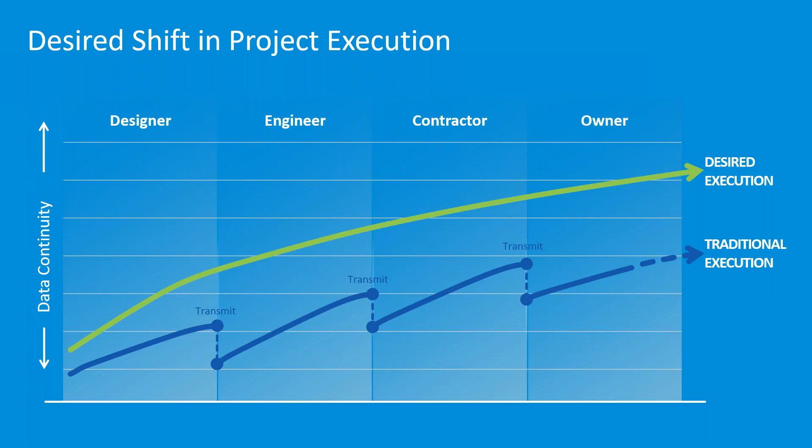So essentially, if you have in the end a very rich model where we've used asset tracking, where we've used all of the different aspects of BIM 360, then we get a very intelligent model that we can report on, that we can hook up to sensors, et cetera. So that's really the story of digital twin of 2 weeks ago. But as I mentioned at that time, there is really a piece still missing, which is in pre-construction, which is sort of the constructability.

Can we build it? How does clashing work, et cetera, which is really the remit of BIM 360 Coordinate. But essentially, again, single source of truth, we do get our common data platform, which is BIM 360 Docs as the main driver and vehicle, if you will, for all the information. And then depending on the discipline that you're working in, there might be some added tools on top of that, such as BIM 360 Design, but also BIM 360 Coordinate and BIM 360 Build.

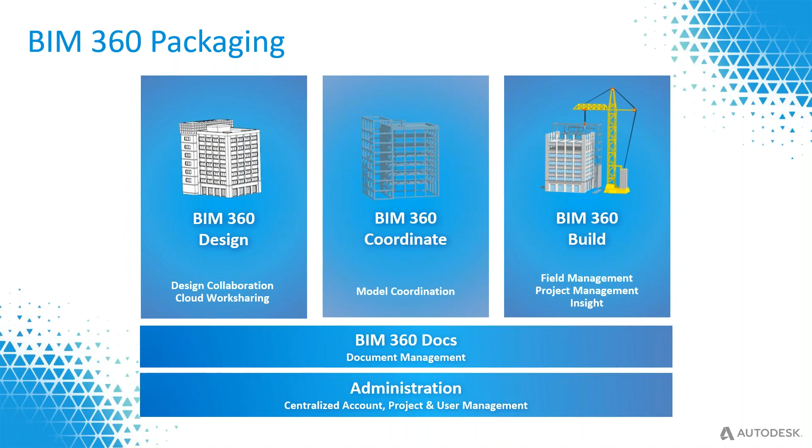So over time, before the holidays with the BIM 360 Design webinars, and then after the summer holidays with Digital Twin, where I did talk about BIM 360 Build as well, the only thing that sort of was missing was BIM 360 Coordinate. And there is quite a bit to talk about here, so that's why I kept it into a separate webinar. So that's what we're going to be looking at today.

So BIM 360 Coordinate, essentially, these are things that we see around the business. So in general challenges, it essentially is, again, around communication, right? We've already talked a lot of times about BIM 360. One of the key aspects I keep saying, and I keep repeating myself, is indeed that large model viewer, which allows us to view just about any file without the original authoring tools such as Revit or AutoCAD or Civil 3D or even Bentley MicroStation or whatever.

But still, when it comes to collaboration between different disciplines, yes, we've seen BIM 360 Design, yes, we've seen packages, but what about making sure that we don't have clashes, for instance? How do we make sure that we have communication between those different teams from that aspect? How about missing project information? Do we have all the relevant information inside of the same location? That's also very important.

And then one of the last aspects is that coordination is indeed considered to be a specialized activity, not just from the discipline itself, where we have to understand how to filter clashes, because if I just clash one model against another, I'm bound to find thousands of clashes. So you need to sort of filter out and understand what these clashes mean, but also because it is critical that we do coordination between different disciplines.

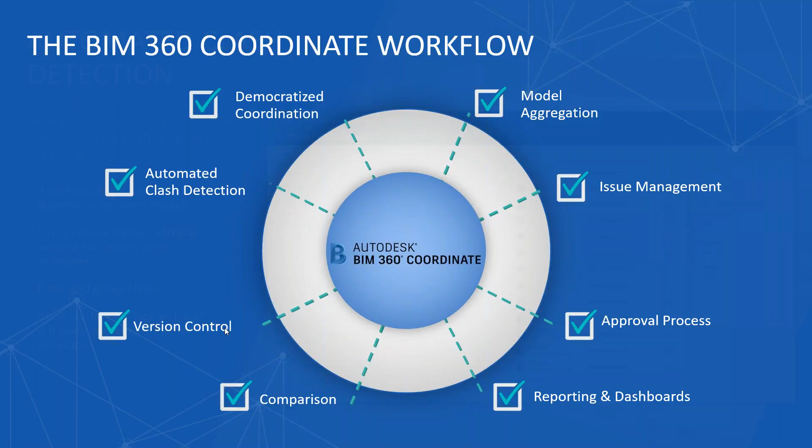Issue control and version control. So it means that we can have issues on clashes, and maybe in the next version we've solved that problem, so those issues can be closed. And so essentially that's sort of what we're looking at from a BIM 360 Coordinate point of view, right? So automated clash detection, and we'll go through the actual tool in a second.

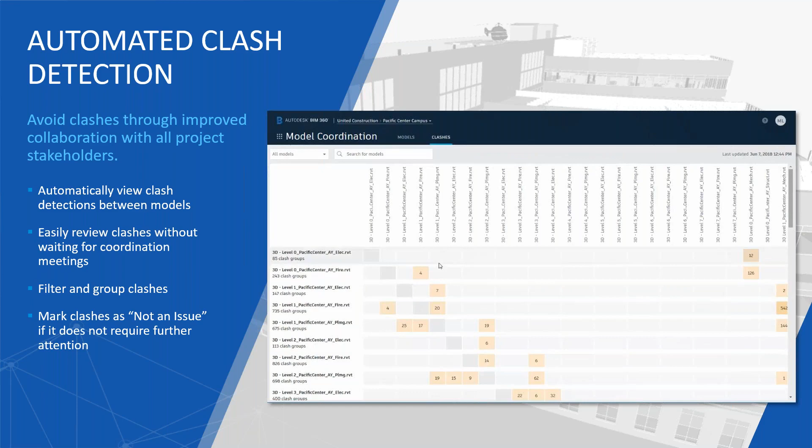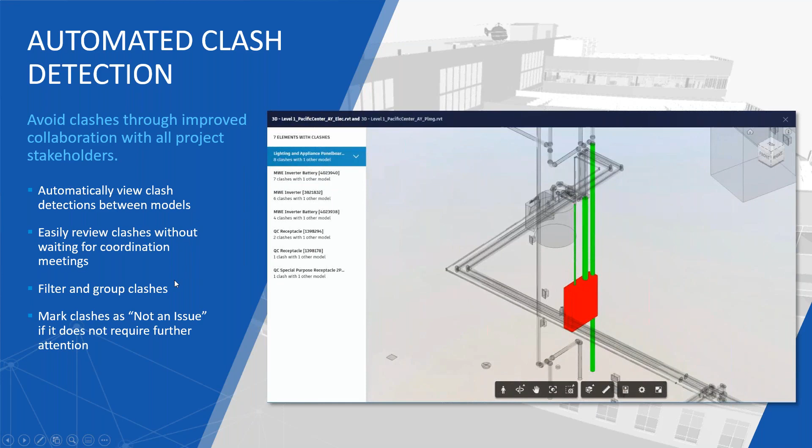It essentially means that we've got what we call a coordination space. We drop data into it and automatically we get the clashes. We get this nice matrix layout, which will help us understand how that clashing is working. So that's one aspect. We'll see all of this in action in a second. So automatic clash detection. As I mentioned, democratized coordination.

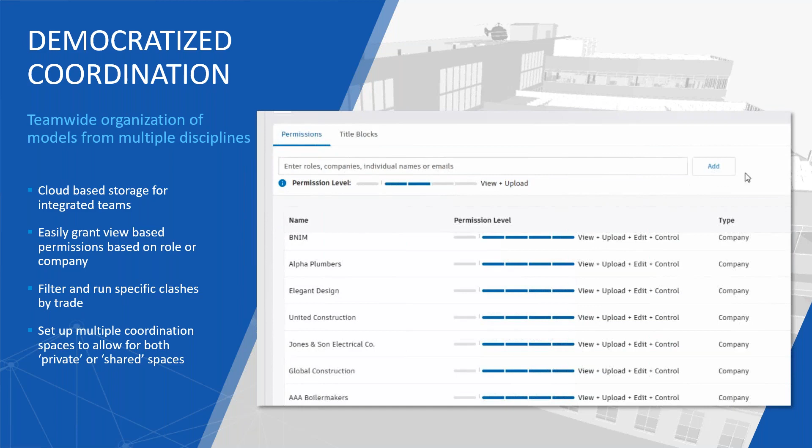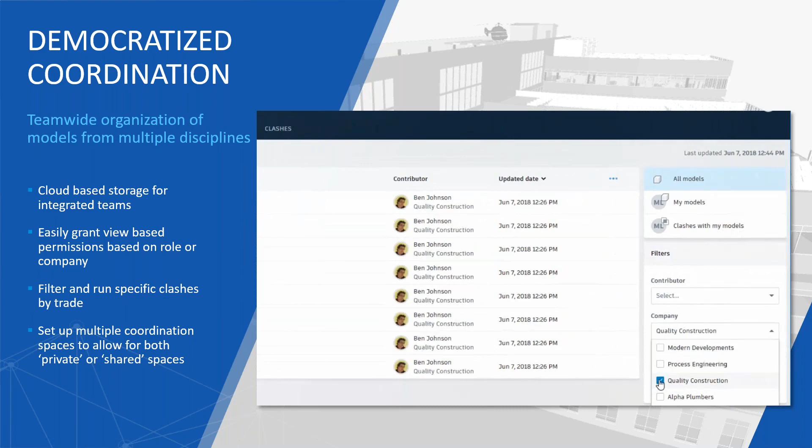It isn't anymore about having to understand how to upload. No, it is BIM 360 Docs at the basis. We can actually, and I'll talk about a workflow which will leverage BIM 360 Design actually, and the packages there, but we can leverage that information right inside of BIM 360 Coordinate. So essentially it means we have a design, we save it to the cloud, and we automatically get our clashes out of it. We'll talk about that workflow in a second.

And then model aggregation. One of the things that we can also do is that, well, obviously, if we want to clash elements from, let's say, structural to HVAC and vice versa, or to electrical or whatever, it means that we have to be able to bring those models together.

So one of the aspects of BIM 360 Coordinate is also that we can view different models in context of one another. All right, so last thing is obviously when we find clashes, we need to be able to create issues on them, and that's sort of what is happening here as well. So once we find a clash, we can say, right, let's create an issue.

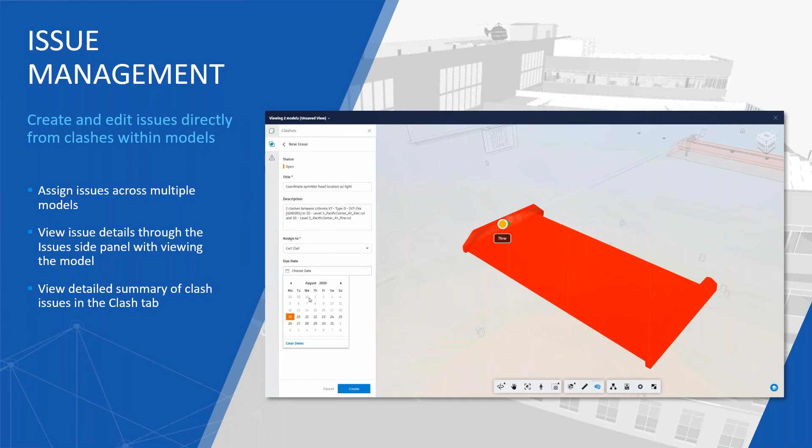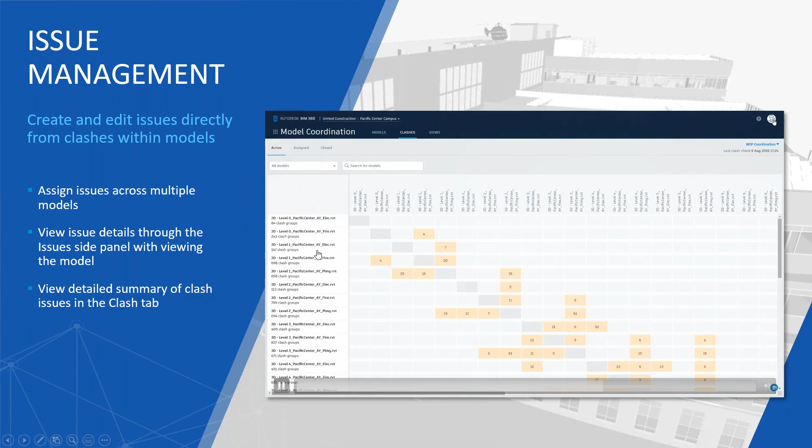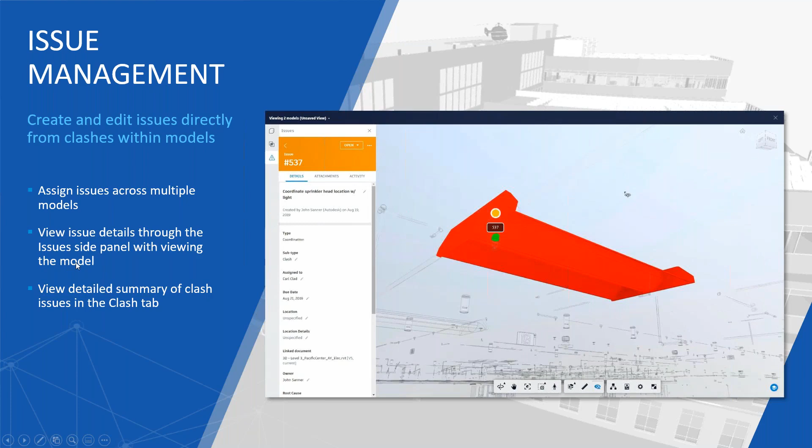And the most important thing here is that if you saw the previous presentations on BIM 360 Design, where we can approve packages or we can send packages back, we can create issues on those. We can create issues in one file. We can create issues in BIM 360 Coordinate. They all end up in the same place, which is BIM 360 Docs essentially. So we can start reporting on them, we can start pulling out information from them, etc. So that's sort of what I want to highlight from a PowerPoint point of view for BIM 360 Coordinate.

So let's dive into the actual environment. So I've got my BIM 360 Coordinate open here. Actually, it is, of course, BIM 360 document management at the basis. And again, what you'll notice maybe if you followed the other webinars is that I'm still in the very same environment, still the very same BIM 360 Docs project, which is BIM 360 FY21. And so again, to reiterate the fact that this is indeed a single source of truth, when we talk about BIM 360 Design, we talk about these folders here where we have our architectural project, our MEP project, etc.

Now, what we have here is what we call a coordination space in BIM 360 Coordinate. So I've mentioned this in the previous webinars as well. We're looking at our single source of truth from a document management point of view here, but we can also sort of filter our information based upon what we're looking for. So for instance, assets, which I spent a bit of time on last time, cost management, for instance. So there are ways of filtering this information. Amongst other things, there is this model coordination aspect, which I'll dive into in a second.

And essentially, the only thing we need to do is tell BIM 360 where my coordination spaces are. And in this case, I've created my aggregated folder here. And what you'll notice is it says here master.rvt. One file is in my aggregation space. So just to go into my configuration here, just to show you that this is indeed how we set this up, it's actually quite simple to do. We go into our project admin, we go into model coordination. Just bear with me for a second. There we go, model coordination. And so quite simply, it says here aggregated project files, coordination aggregated is the folder.

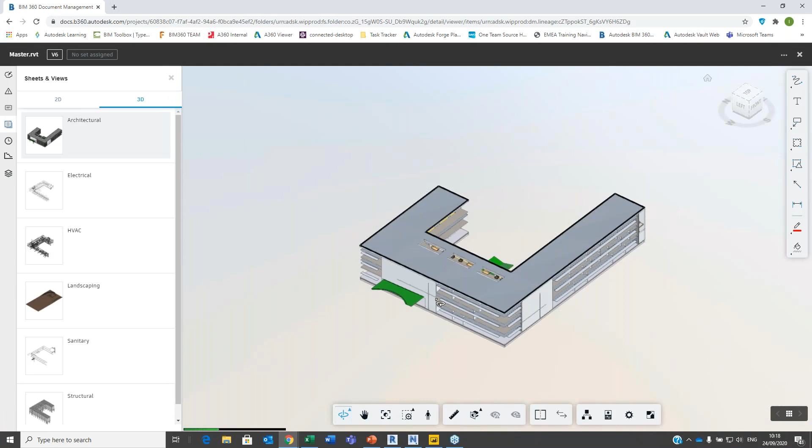Okay, so let's go back into document management. And just to reiterate, we're in coordination aggregated. And again, what you'll notice is that it says here master.rvt, one Revit file. So how can we clash elements from a Revit file? Well, actually what we're doing here is that we're going to be looking at views that we created inside of this file. So before we go into clashing, let's just have a look at what it is that we have here. So inside of my master file, I have different views. So architectural, electrical, HVAC, etc., right?

So essentially, that means that if I now move over to my model coordination, it's going to tell me that there is indeed just the one file, master.rvt, but it has multiple views. And so we're looking at this from the model coordination aspect, if you will. So I can now say, okay, first of all, before we go into clashes or anything, let's just have a look at maybe the HVAC system.

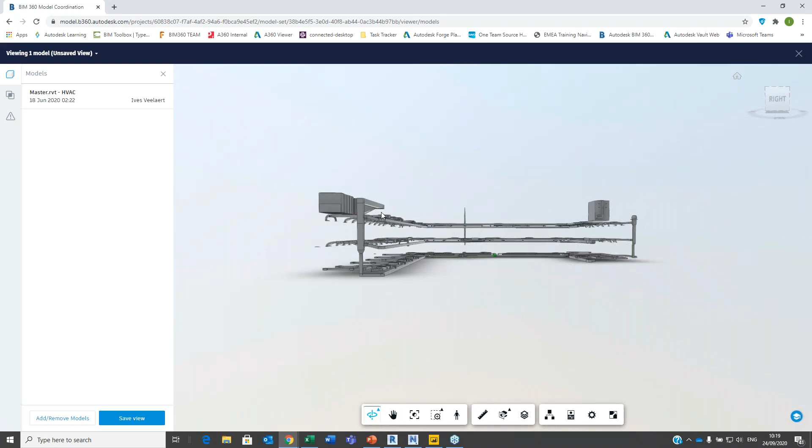Okay, so nothing special. This is what I've just shown you in BIM 360 Docs itself. This is indeed the HVAC system, right? So that's what we have in the building. The difference is that I can now say add remove models, and I can now say, okay, I want to have sanitary as well. So you'll see that it now says I'm loading 2 models, and there's my sanitary.

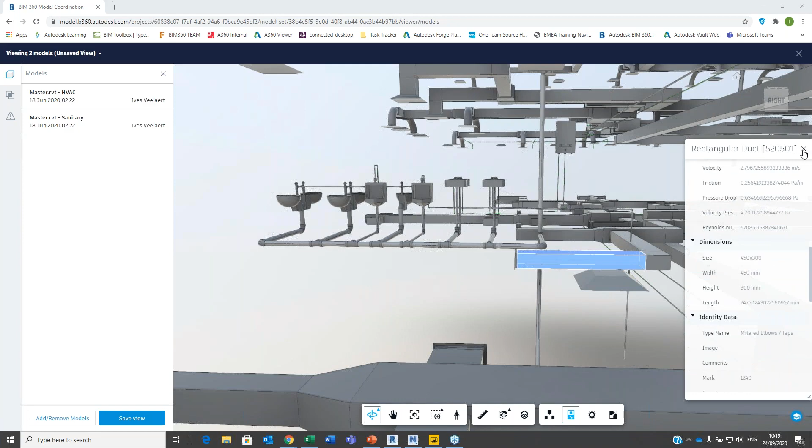And I got, again, all the richness of this viewer is still there. If I want to understand what this is, I can still go into the properties, and it's going to tell me this is a rectangular duct. It's got all the information from Revit inside, and that's what we see here. Okay. So yeah, we've got HVAC, we've got sanitary.

Let's just continue to add some stuff. So maybe the electrical bits and pieces. So let's have a look at that. So we now have the lighting fixtures, we've got the electrical sockets, etc. And we can continue to move on. Maybe I want to see the landscaping now. No, let's first do structural. Select. There we go. So now we've got floors, actually floor slabs. Okay. Whoops. There we go.

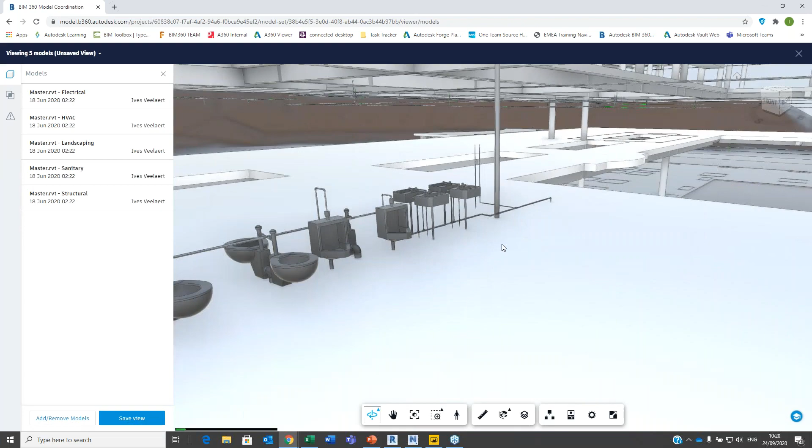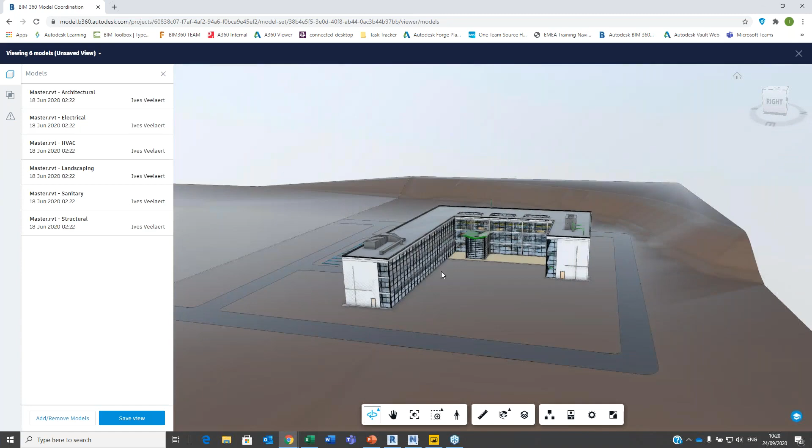And let's just continue, so I want to have the landscaping, select. Okay, so here's my terrain now. And finally, I'm going to add architectural. So those are just views. And let's just go out here for a second. There we go. So these are just views, this is one Revit file, different views, and we're looking at this in a combination. Okay. So that's the first aspect.

And what we can do now is, well, we've got all those different models, so we can clash them. And actually, this is happening automatically, right? So we can actually go in here and say, look, we've got our clashes. And what we're looking at is a matrix of each and every one of the views clashed against one another. So architectural versus architectural, well, that's not gonna tell us much because that's gonna be everything, right? So on the central axis, if you will, it's the view against itself. So that's why we don't have anything in here.

So architectural versus electrical, for instance, gives us 62 groups of clashes, and I do want to specify groups of clashes. I'll explain that in a second. Architectural versus HVAC 134, etc. It's also color coding. So the more orange and the more red it turns, that's where we really should be focusing on, maybe. So architectural versus structural is giving us 1,488 clashes, groups of clashes, I should say. Right. So let's focus on something here.

So maybe you've noticed that if I clash HVAC versus electrical, for instance, it gives me a result. But obviously at the other side of the axis, electrical versus HVAC should give me the same result, right? HVAC versus electrical 5, electrical versus HVAC 4. So that's not really in line, right? So what's happening here? Well, this is where the grouping comes in, because it tells me there's 4 clash groups, and here are 5 clash groups. So let's keep this very simple.

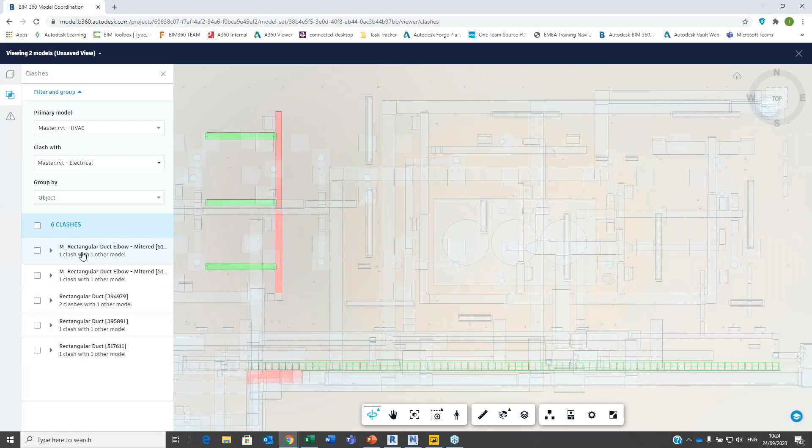6 clashes, but from, again, an HVAC point of view, I'm looking at 5 groups, which essentially means I've got my 1 problem here, which is that one. I've got my 1 problem over there. I've got my 1 problem sitting over there, 1 problem again over there, and I've got 2 problems over here. See? So that's how this is working.

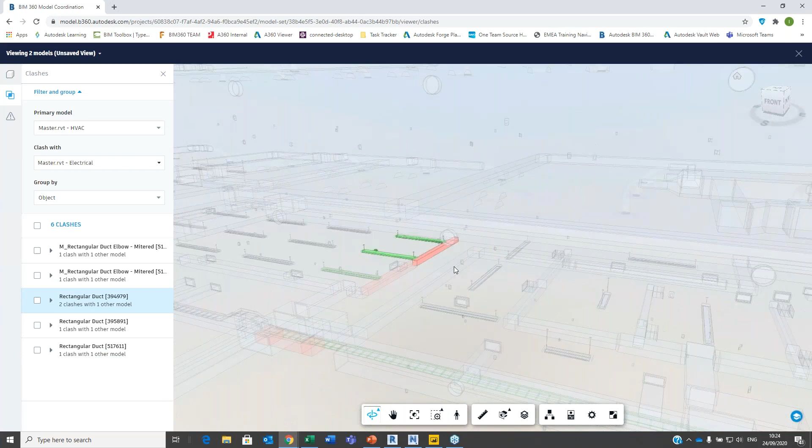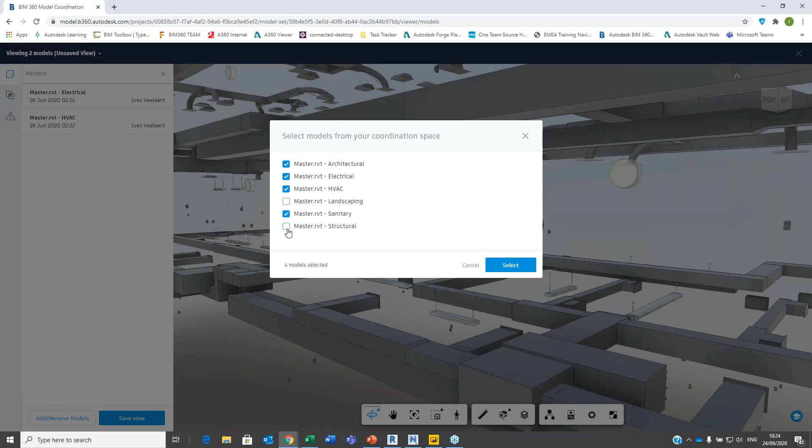Now, what you'll notice, and this has been added like this week, what you see here is that we've got our elements in context of one another, right? So HVAC versus electrical, and that's it. Now, maybe I want to see the rest of the model, right? So what I can do is I can go back into my models here, and I can say, you know what? I want to have all of, let's not take landscaping here, but let's focus on the rest here. So I've just added everything.

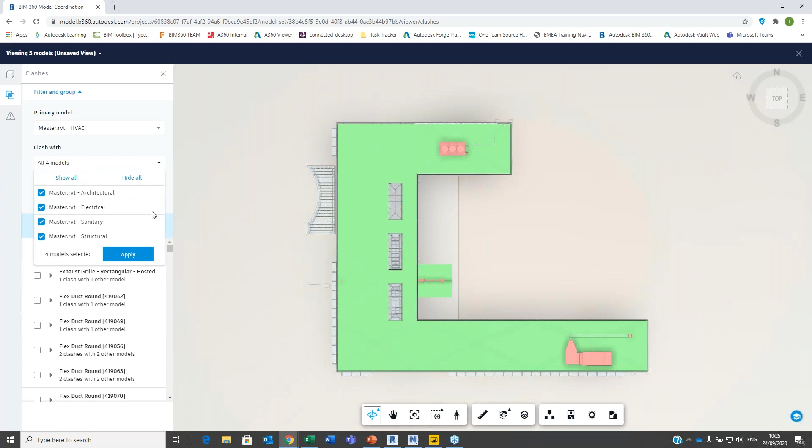If I go back to my clashes, I can now say, okay, HVAC, that's fine. And it's going to clash now with all 4 models. So it's now in the matrix, it's now taking multiple columns together. We've got 1,118 clashes across everything. Now, maybe what I want to do is still just focus on the electrical bits and pieces. So what we have now is, again, those 6 clashes, but now in context of the architectural model, etc.

And so from this point on, it's quite simple to say, I want to create an issue on this one. It's going to create a screenshot. We can assign it to someone, etc. You'll see that in a second. Now, the other aspect is that we can also get our elements sorted by a certain group. So in this case, we're just looking at objects. We can also say, okay, in the case of HVAC, I want to understand this from a systems point of view. So the mechanical exhaust air has 3 problems with the cable tray, as you can see here, right? And again, we can create issues on that. Right.

So, okay, I've got my views. I can look at the clashes. So let's go back to my clashes here for a second. This is pretty flexible because I could say I want to search for models. Maybe landscaping. What's the point of having landscaping clash with like a pipe that will run into the ground, you know? So maybe I just want to get rid of landscaping. So what I can do is just remove this here. And we now get a matrix of 5 by 5. Landscaping is out of the picture. So very flexible to actually go in and say, look, I wanna understand clashes between certain views, if you will, certain models.

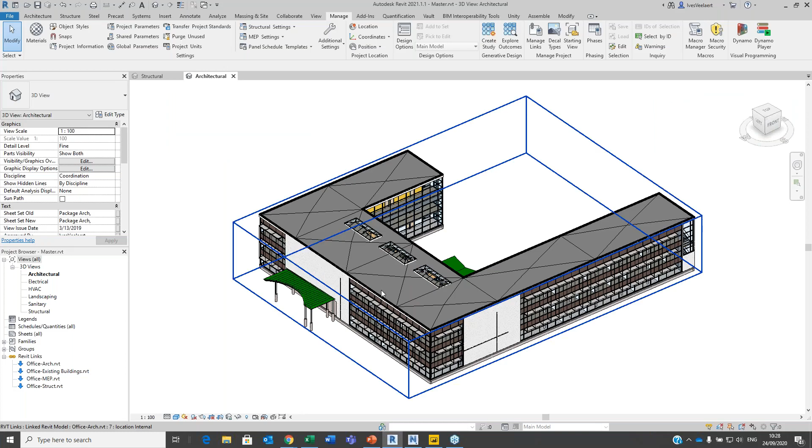Now, the question is, what did I upload here? So what you'll see is that I've got my different views. Those are the views that we do have inside of BIM 360 Coordinate. But what you'll also notice is I don't really have any elements in here. This actually is a link.

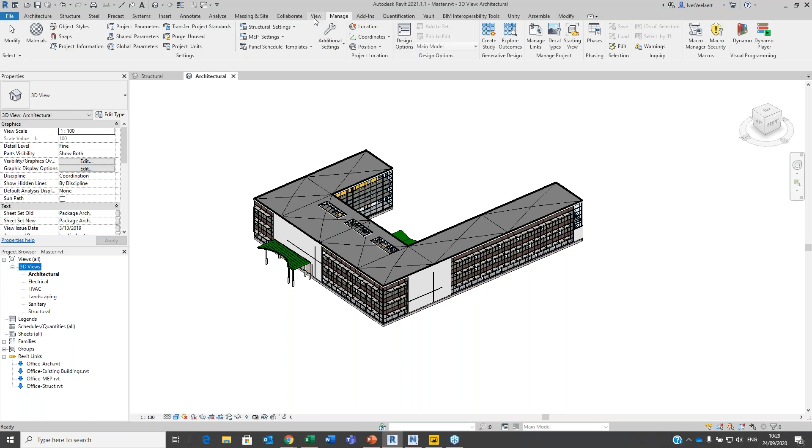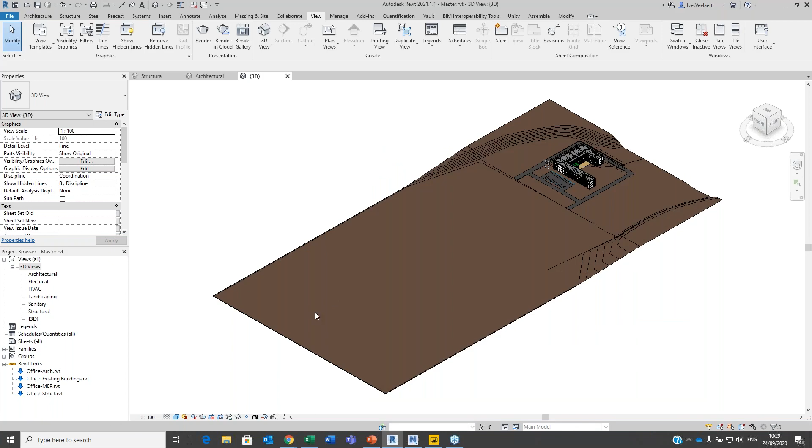Okay. So just to illustrate this, let's just quickly create a new 3D view here. There we go. So we've got everything here. Let's just fine tune this a little bit. Consistent colors. There we go. And I'll go in and we've got everything activated here. Let's just select all and activate everything. Right, so I've got all elements visible in this view, right?

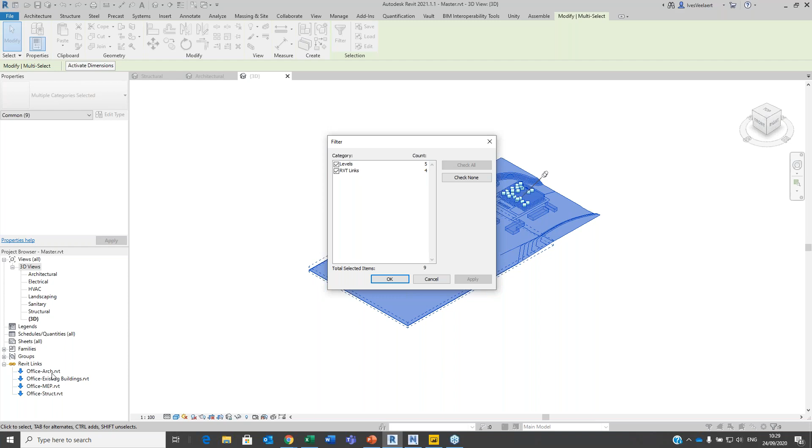So what happens if I now select everything here and we go and filter this? Well, obviously in Revit, we also always have levels, but the only thing it shows here is links, Revit links, 4 Revit links, which corresponds to this. And guess what? Office architecture, existing buildings, MEP, structural is exactly what we see in here.

And guess what? It tells me that office architecture is the one that I've linked from BIM 360, FY21, project files. Guess what? Shared architectural, shared landscaping. So essentially in here, what I've done is this file is an empty file. It just links in the information from this location, architectural, landscaping, MEP, structural.

So what does that mean? It essentially means that from BIM 360 Design, we get a new version, hit save to central, publish the file, create a package. That package goes into Shared. Those other disciplines, before they accept the package, they can actually just walk in here, look at master.rvt, understand the clashing, and see if it's all relevant to them. Okay, so that's what we have here.

Right. So the other aspect is that we can create issues, right? So we find a clash. So let's have a look at our issues here. And so immediately what you'll see is that this one, master.rvt, it says here clash with cable tray. It sits in document management, and this is very important because it means that we can actually look at this file in BIM 360 Docs without a coordination module attached to it.

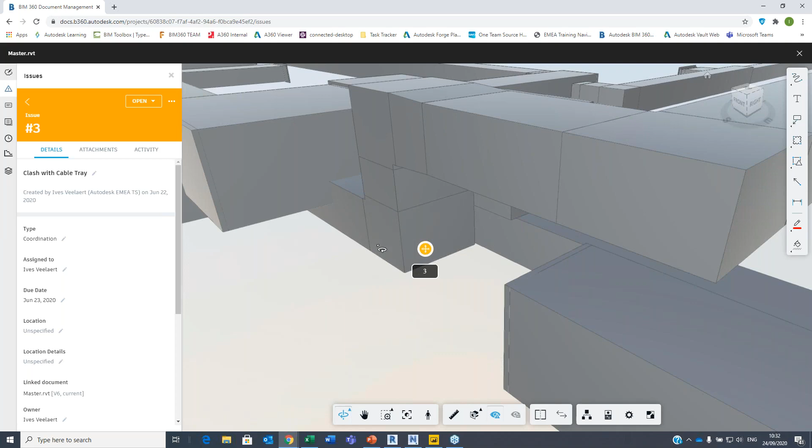So essentially what we have here is that we look at this from the HVAC point of view. This is the guy that needs to resolve it. Now, obviously, we don't really see the cable tray that's clashing because, again, this is basic BIM 360 Docs. We do have automatically an attachment here, and we could actually put some markups in there as well. But essentially, this is what we're looking at. So this is automatically attached to my issue.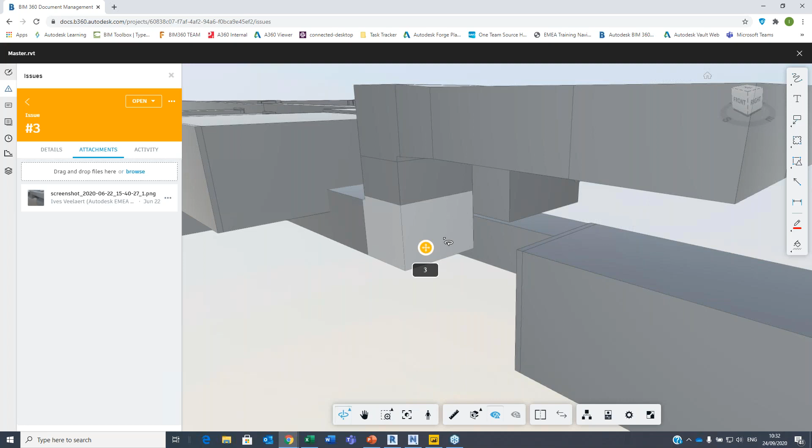Okay, and so we can look at this, we can open the Revit file, we can pretty much try and solve this problem. Now, I did mention that we also have this collaboration, if you will, with Navisworks. Let's answer a couple of questions that I tend to get here. One is, how do you get to those views in model coordination? What if I want to split out by level is one of the questions that I tend to get here.

You know, what you can do is go into Revit, because these are just filters on my views, right? So if I want to have just the one level, I can do so. I can create multiple views and I can publish them into this environment. And if I then want to see, okay, I just want to have, let's say, architectural, see, this is filtering out. So if I was to say I've got multiple levels and I just type in level 1 here, I would get all the disciplines, electrical, architectural, MEP, etc., of level 1.

So that's how we can class this. And again, we could also filter here where we say, okay, level 1. Of course, I don't have that in the title or anything, so we won't see anything. But that's where this matrix would get filtered out, actually. So that's one aspect. So basically, it's down to Revit to make sure that we have these set up. And this could be in a template, right?

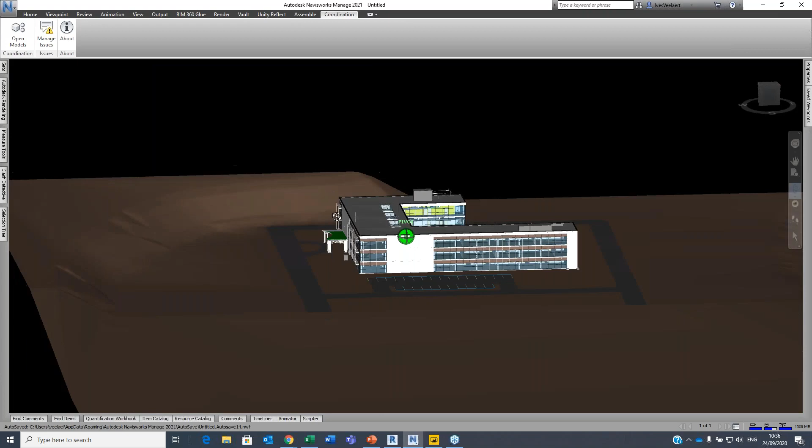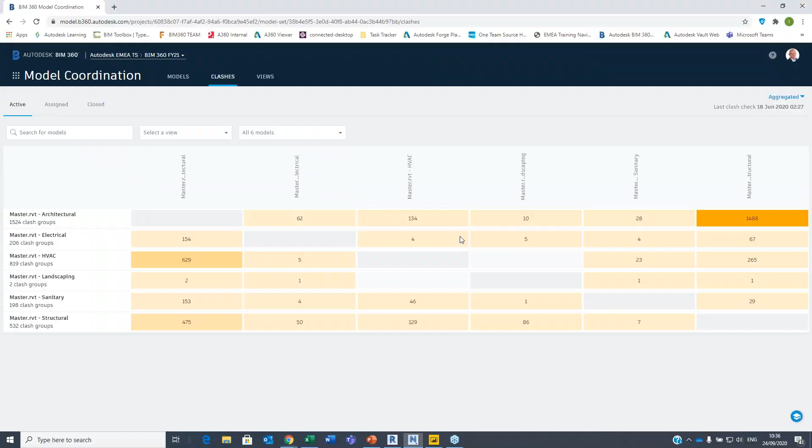We're just looking at this master file now, and it's loading those different views, if you will. And those views will pop up in my selection tree, and I can, again, slice and dice this any way I see fit inside of Navisworks. So it's loading all those different aspects. And again, we're looking now at those very same elements that came from the shared environment from BIM 360 Design, if you will. So let's first make this a little bit nicer, and let's do some horizon here. Let's start walking for a second and maybe zoom in a little bit. There we go.

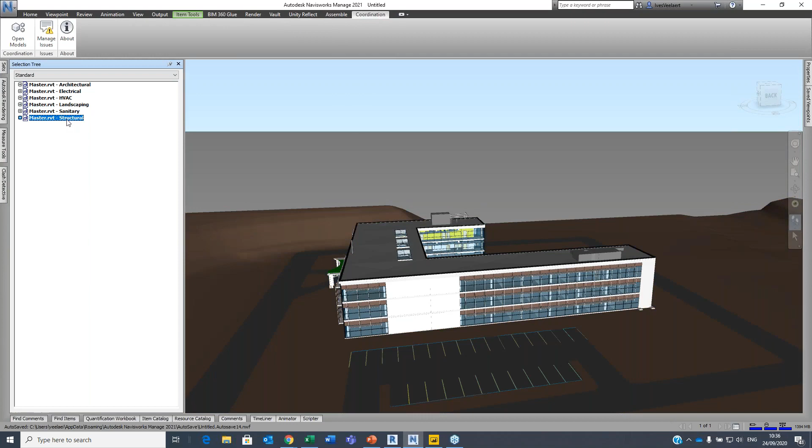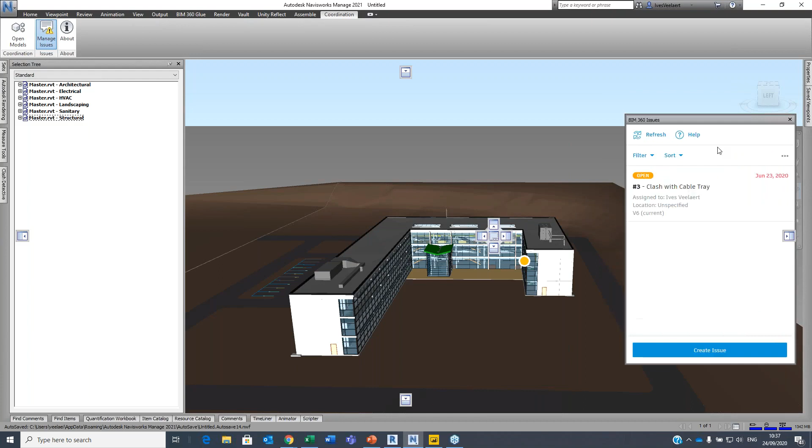Okay, so we've got everything here, right? So if I just want to see my selection tree, let's just activate that for a second. We've got all of our different models here, which are basically views which came from the shared environment from BIM 360 Design, as I mentioned. And so what we can do now is take it to the next level and say, okay, we've got all these views. Remember that I had this issue, which was the clash between HVAC and that electrical cable tray. So I can go in here and say, manage those issues. And you'll see that it says there's a clash with a cable tray, which again, I can view here.

So this is exactly the same thing as what we have inside of BIM 360. It has the same status. I could actually close it here or answer it or whatever. The attachment with the view is still there. You know, everything is there. Now we're looking at all of these different models. So we have that functionality of Navisworks just at our hands, right?

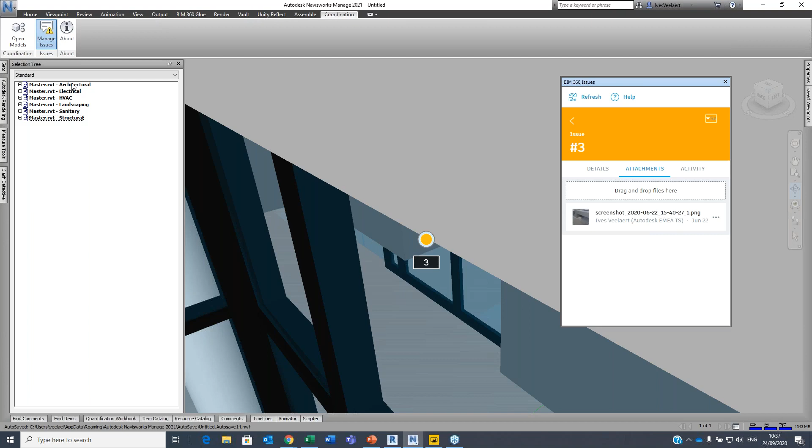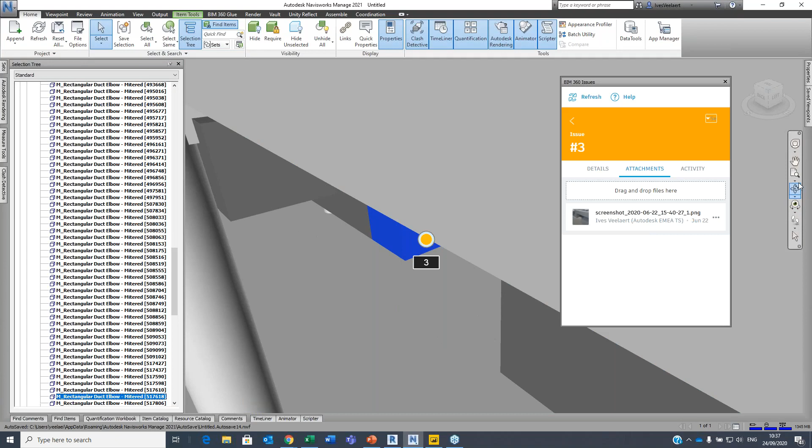So architectural, I want to get rid of it. Landscaping, let's get rid of it. Sanitary, let's get rid of it. Electrical and HVAC, that was important for this clash, of course. And you know what? I want to keep structural in as well. So what I can do now is just hide those elements. There we go. And so now I can have a proper look at this clash, which will show me the HVAC system and the electrical system as well.

Okay, so we've got all of this here. So let's take it again to the next level and let's rerun those clashes, but now from a Navisworks point of view. So what we're gonna do is let's just zoom out a little bit. This is fine. And what I'm gonna do is I'm gonna open up my Clash Detective. I'm gonna set up a test here. Let's just keep it as it is.

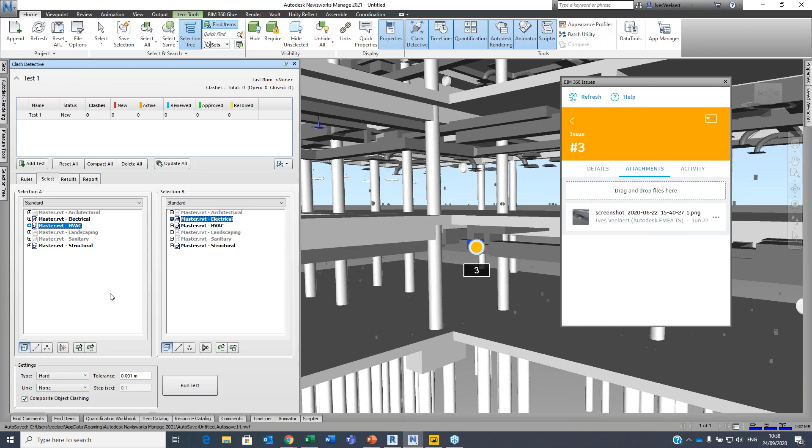And I'm gonna clash, let's say, HVAC against electrical. That's fine. It's still a hard clash, but in this case, we could therefore fine-tune it. Let's say HVAC electrical. Yes, that's fine. Run the test. And what you'll see is that we have 6 clashes, which corresponds again to what we have inside of BIM 360 Coordinate.

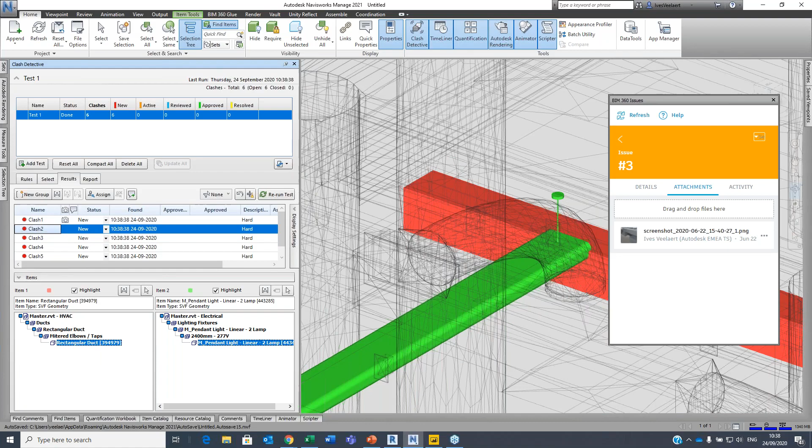All right. So we've got clash number 1, clash number 2. And interestingly enough, my duct here is the one that's causing the problem with the 2 pendant lights here, which corresponds exactly to what we've seen inside of BIM 360 Coordinate, right? So if I look at my 2 clashes here, that's exactly the same problem, and it has grouped them by the rectangular duct. So again, that advanced functionality that we have inside of Navisworks is still there.

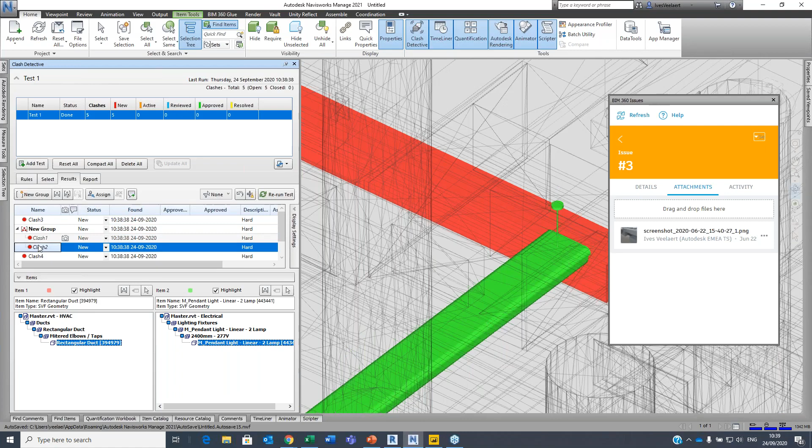So if I say rectangular duct, group clashes involving this item, you'll see that it now says this is a new group with 2 clashes, which is this one and that one. And again, if we now want to take it to the next level and say clash number 4 is really a problem, I could just go in here and say, you know what, I want to create an issue here, assign it to this point. It will pop up in BIM 360. We can look at the issue list, etc. So a full-blown round-trip workflow between BIM 360 Coordinate and Navisworks. Okay.

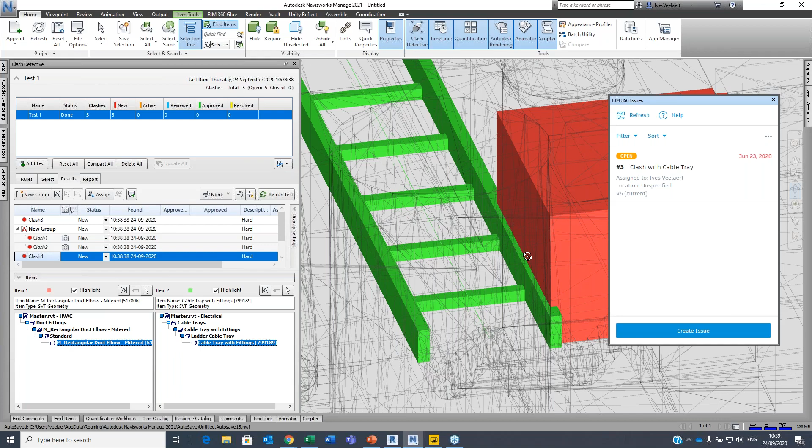Right, last thing. So how does this then relate as a Navisworks file to BIM 360? Well, remember that we still have Desktop Connector. So if I go into my Windows Explorer, what you'll see is that we have BIM 360 here, and we've got EMEA Technical Sales, BIM 360 FY21, project files. So I could actually go in here through Navisworks and say, okay, I want to save this as an NWF file, or I want to publish this as an NWD file and push this into BIM 360.

So anyone around the globe that has access to that folder inside of BIM 360 Docs essentially has access to that same view, those same results. They can go into the issues, they can look at BIM 360 Coordinate if they have access to BIM 360 Coordinate. Otherwise, they'll look at it from a BIM 360 Docs point of view. And so again, very flexible to tie all of this together.

I showed very specifically a Revit workflow. I haven't looked at the questions just yet, but I'm imagining there might be a question around IFC. So yes, we can do the very same workflow with IFC files as well. Right, so that sort of concludes that first step, which is BIM 360 Coordinate, BIM 360, and Navisworks. So let's go back to my PowerPoint here for a second.

And I do want to very briefly talk about Assemble here, because I do get a lot of questions. What's the difference between Navisworks and Assemble? What can you do with Assemble? Why is Assemble there, etc.? So Assemble is very much a tool that sits within the planning stage, just as BIM 360 Coordinate and Navisworks are sitting there. And Assemble basically does a couple of things that it's quite unique at.

It can validate information. So let's say that we move forward in design and we are adhering to LOD, level of detail or level of development. And at some point in time, fire rating needs to be added to a building, for instance. And we receive a file from the architect and we want to validate whether all doors have fire rating attached to them. So that's one of the aspects that we can very easily do inside of Assemble, verifying a model and, if need be, sending it back actually.

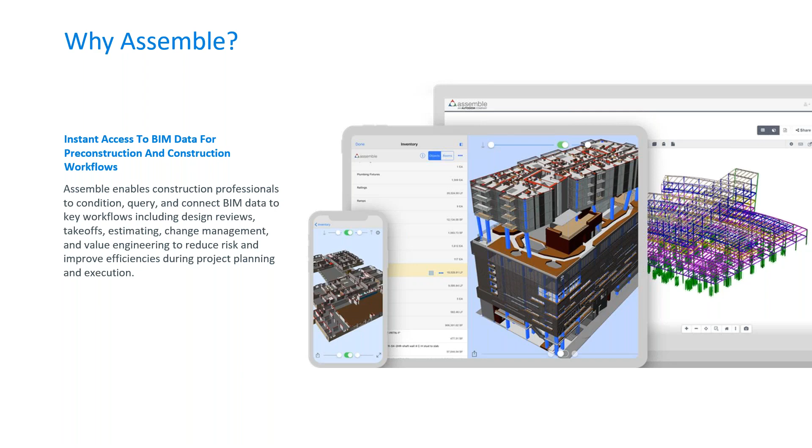Another aspect of Assemble is that it can do a pretty far-fetched quantification and indeed cost if we choose to do so. So essentially it means that we've got our design models, and through model conditioning, basically reporting on parameters on the Revit families, on the IFC models, on whatever can be uploaded in Assemble, and I'll get to that in a second, we can sort of put legends on it and say, okay, what sort of categories do we have?

We want to filter this by level maybe, etc. And essentially it means that we can enrich our BIM model with specific Assemble encoding, if you will, such as working location breakdown, quantity takeoff, estimation, etc. So that's what we have here. So again, let's have a look at how this is working.

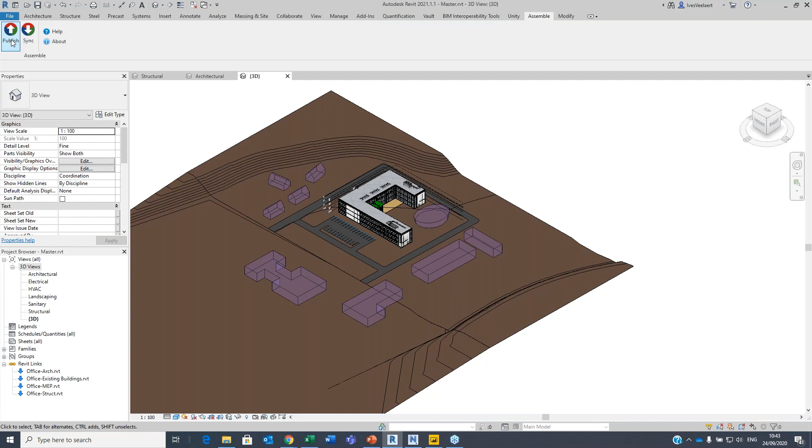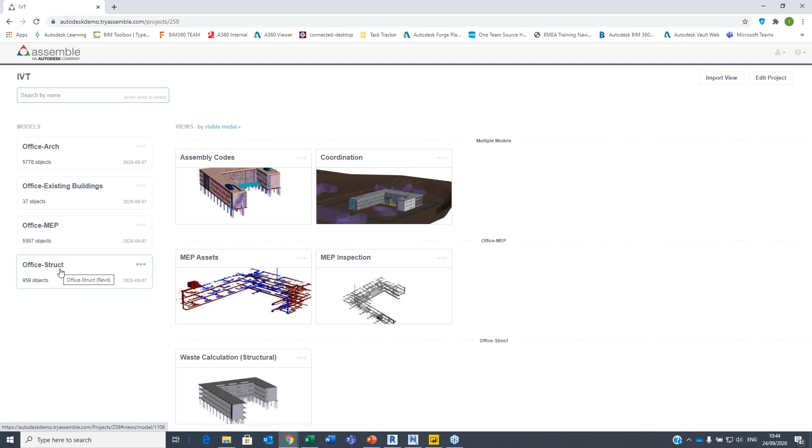So as I mentioned, this works for Revit, this works for AutoCAD, this works for Navisworks. So any file that you can get into Navisworks, we can also push into Assemble. Okay, so IFC files, etc. And the first thing is, again, same thing. So there is a bit of overlap with Navisworks. It just depends on what you want to use it for. So I could go in here and say, okay, I want to view this structural file. And this is going to represent that structural file in a little bit of a different way compared to how we see it in Navisworks.

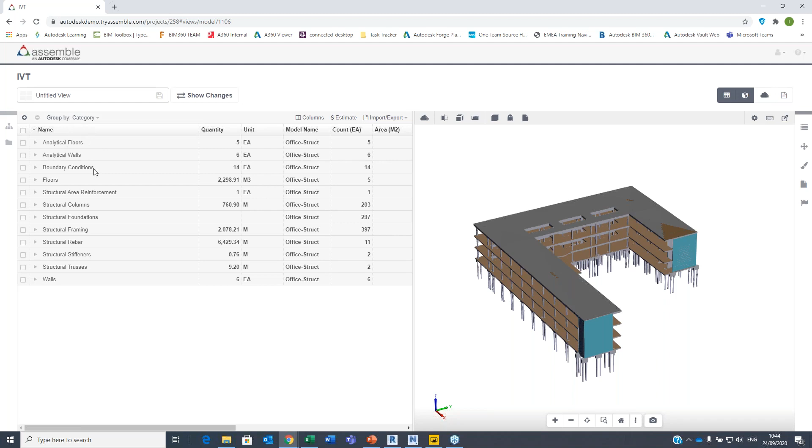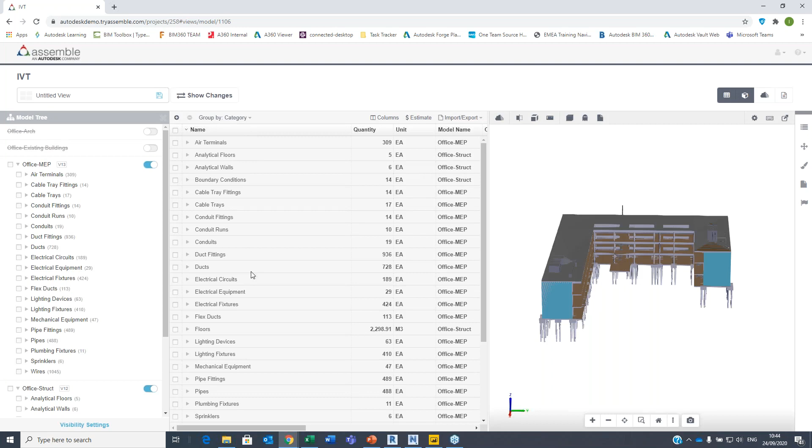In this case, we have our inventory and we've got our model next to it. So our inventory is just a listing of all the objects, all the elements based upon a certain parameter or a combination of parameters. So in this case, it's just showing me all the different categories, so you'll see that there's about 15 categories. What I can do is I can go into the model tree here and say, you know what? I don't want to have just a structural file. Let's also have a look at the MEP file. So again, this is now going to load those elements inside of my viewer, and it's going to enrich the inventory here.

That's what we see here. Okay, so we now have Office MEP, Office Structural. Let's put in the existing buildings again. So that's the surroundings. There we go. And last but not least, the architectural model to get the hull of the whole thing. All right. There we go. So pretty much the same thing as we have in Navisworks, right? We now have all those different elements here.

So what we can do now is say, you know what? I want to have maybe other parameters here. So automatically, it's telling me that I have 309 air terminals. I've got some analytical floors, etc. Those floors here, for instance, it's going to tell me that we have a certain area, certain volume, certain parameter. And what I can do now is I can actually say, okay, in this view, maybe I want to add columns. Okay, so I'm just going to hit this add columns.

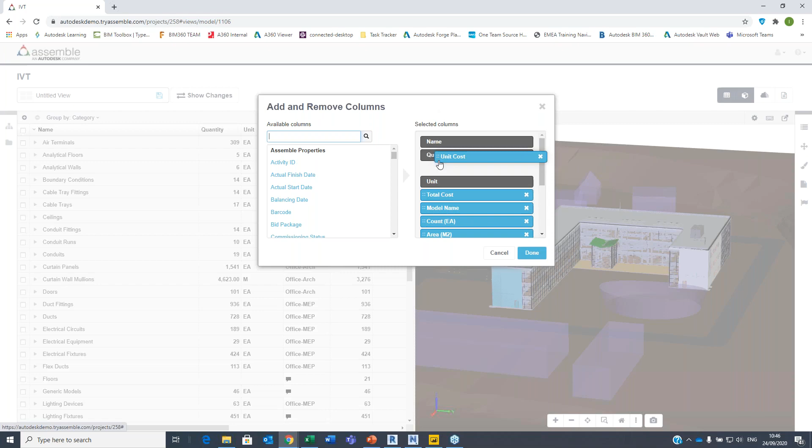And one of the parameters inside of Assemble is the unit cost and the total cost. Cost. Total cost. So what you see to the right here are the different columns: name, quantity, unit. So what I'll do is I've just added total cost. There we go. Oh, I thought I had unit cost as well. I didn't, so I'm just going to put that in as well. Unit cost. Put that in here. Done. And what you'll see now is that it's going to get me the unit cost and total cost of everything. So essentially, what we're looking at here is a cost calculation aspect of Assemble.

Now, the question is, again, how did I get cost in here? And it depends a little bit. So if I look at an air terminal, for instance, so I just selected, by the way, I can just go in here and say change visibility, hide others, and just focus on this air terminal. There we go. If I now take this one and zoom into it, there we go. That's my air terminal. I have ghost mode, so I can activate the rest, so I see where this thing is in context of the whole environment, right?

Anyway, so what we have here now is, as I mentioned, we've got the parameters of Revit. So I've got my instance parameters, type parameters, but I also have Assemble parameters. So this is something that I can configure. This is in the project settings, and you'll see that it says, for instance, barcode.

So we can actually do asset tracking with this one. And there's my unit cost and total cost, okay? And the way we count it, quantity, in this case, it's each, but maybe we have height, volume, width, etc. So we can specify that. So very easy to set up, actually.

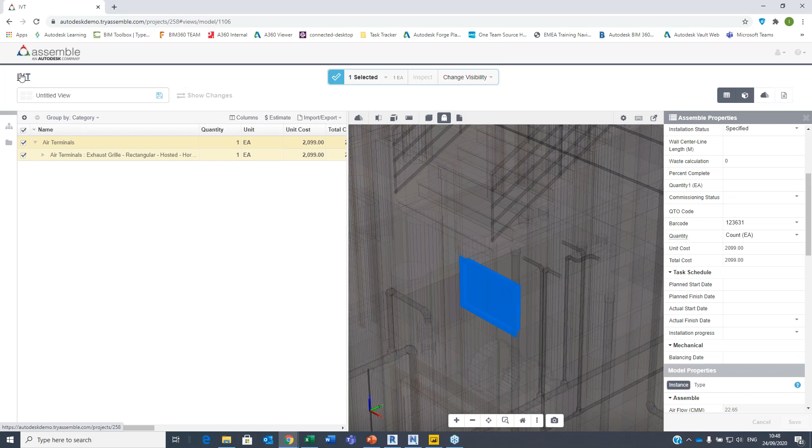Now, you might be wondering, wow, if I have to do that for all of my elements and specify the cost, etc. So that's where the beauty of Assemble comes in, because if I go back to my project here and I go into my project settings, then you'll notice that it says here, Assemble property. So this is where we define our unit cost and what have you. So all of those different properties are in here, but also I have a data tree.

And this is, for those of you who use it in Revit, exactly the Uniformat file format. It doesn't necessarily have to be the Uniformat file format. We can just define this as we see fit. The beauty is we can set this up through an import-export. This is just a text file, so we can export this, and guess what? It says here, export for Autodesk Revit, or export assembly codes and unit cost to Microsoft Excel.

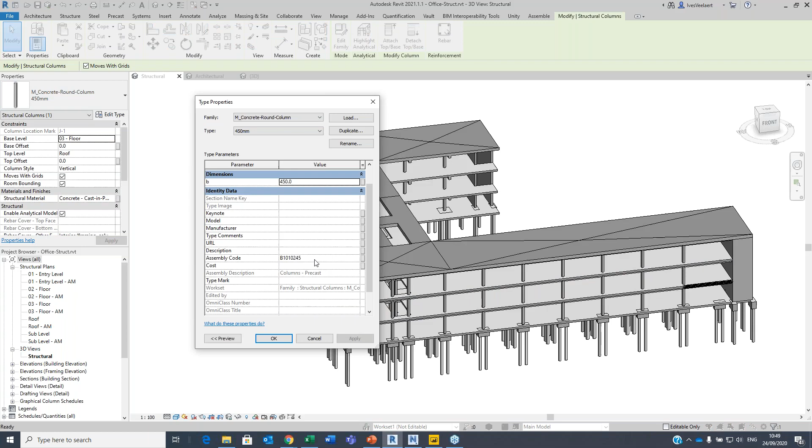So let's go back inside of my model here, and I'm gonna focus on the structural elements. So if I select this element and I go in edit type, then you'll see that from those Revit families, I've already attached an assembly code to the type, which essentially corresponds to additional settings, assembly code, view, this listing. So guess what? A substructure, A10 foundations, A1010, etc. It is indeed very much the same file as what we see here, with one difference.

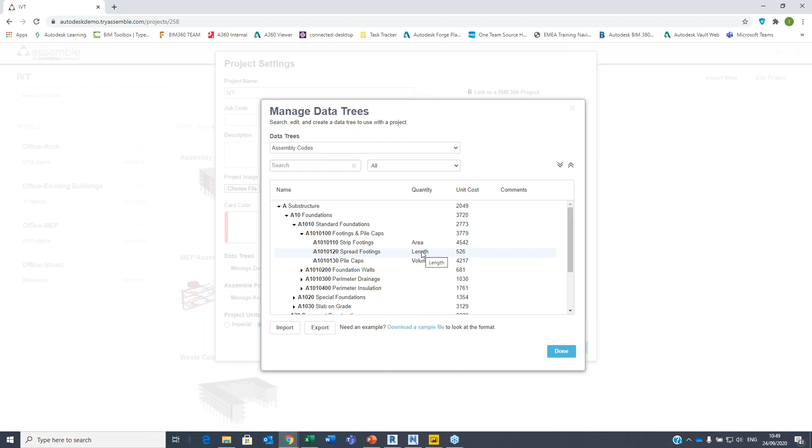In Assemble, I attach unit cost, and I do tell the system how to count for this. So strip footing, I want to have the area. Spread footings, I want to have the length. So this is very powerful, because if we apply a system to Revit and we use the same codes in Assemble, we immediately have the cost, okay? And there's a lot more powerful stuff that we can do with this.

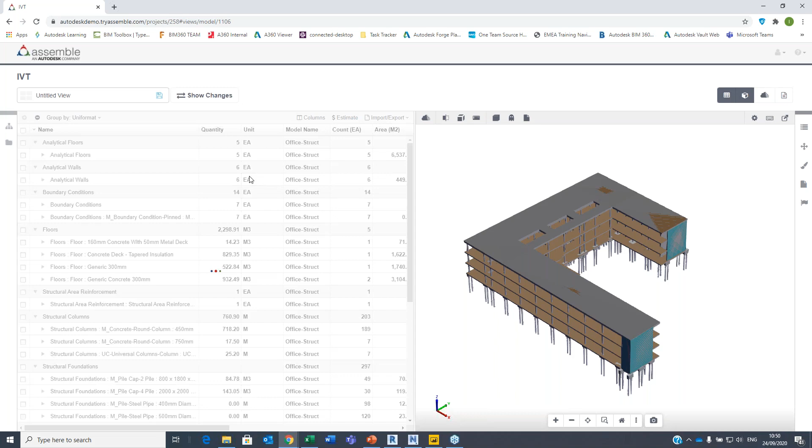So let's go back to our Office structural file. And what we can do here is, for instance, I want to view this not by category. I want to view this by that Uniformat code. So let's just slice and dice this model according to Uniformat code. So change visibility, hide. So I've just hidden one of those elements. Maybe now I want to hide the others. So what we're looking at here is this Uniformat code, structural framing, structural stiffeners, for instance.

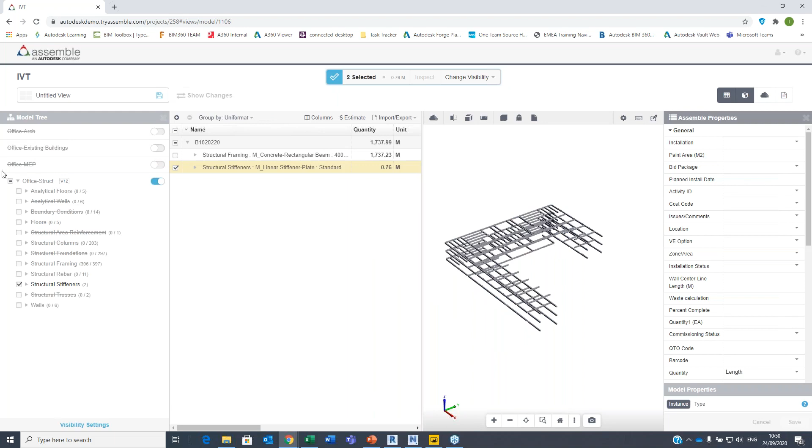All right. So let's just activate everything again unhide. There we go. Let's close this for a second. So I'm back into my overview. And we can actually create these groupings. We can filter any which way we see fit for any file we can get in here. IFC, Navisworks, Revit, etc. So let's go back to category here for a second.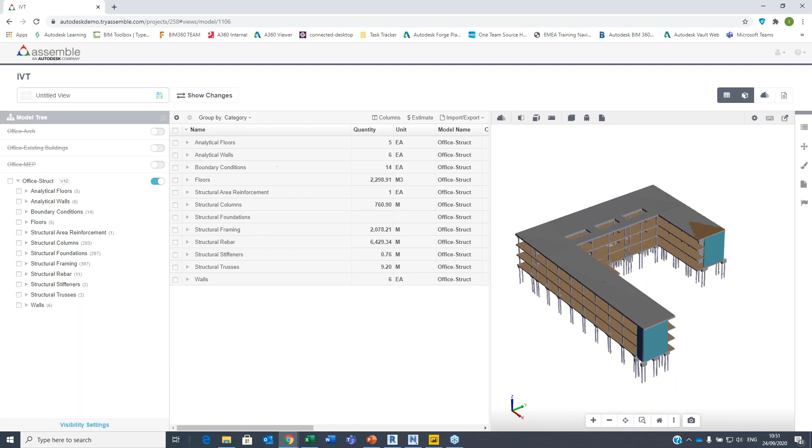The other aspect is that if I look at this, we've got all of our elements, right? I can now say, okay, maybe I want to color this by a certain property. So let's say we're looking at this from a category point of view. Maybe I want to look at this from a level point of view. So let's just take our level here, and it's now going to tell me that there are some elements here on entry level, floor 2, floor 3. And there's also a couple of elements not assigned.

That's quite interesting because maybe, and that's validation, right? Maybe I do want to have them assigned to a certain level. And maybe this is something that's just quite simply wrong. So what I can do is I can go in here and I can apply rules to my elements. I can say, you know what, give me again the level, show only the level with a blank, which is not assigned, right?

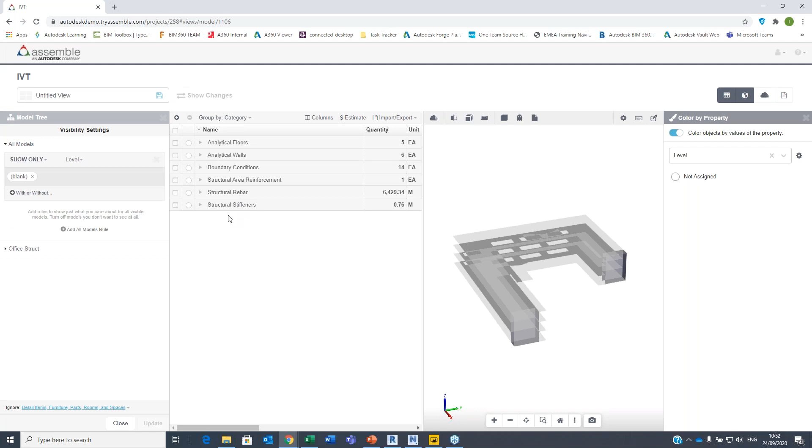So update. Let's see in our inventory what we have. It tells me analytical floors, walls, conditions, reinforcement. So this kind of makes sense. This is something that we don't need actually. Okay, so what I can do now is just reverse this, and I can say hide all of those blanks, update, and it's going to bring me back the structural model, but this time without the blanks. So that's what we see here.

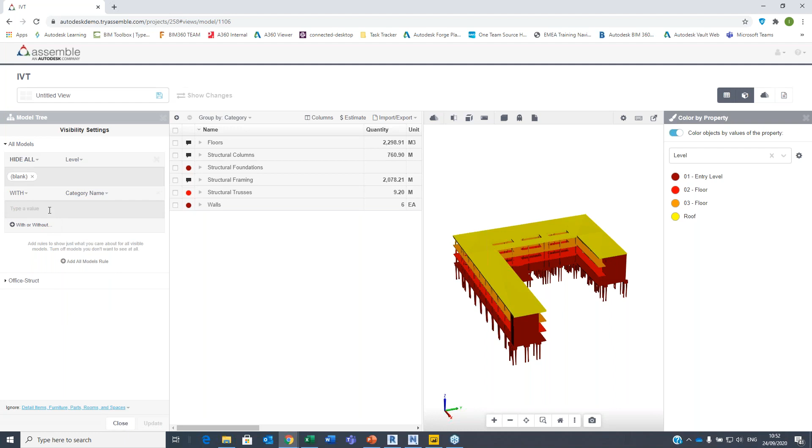And we can continue to slice and dice this, you know. So I can say, you know what, I want another property, which is maybe the category name. I just want to see floors. There we go, update.

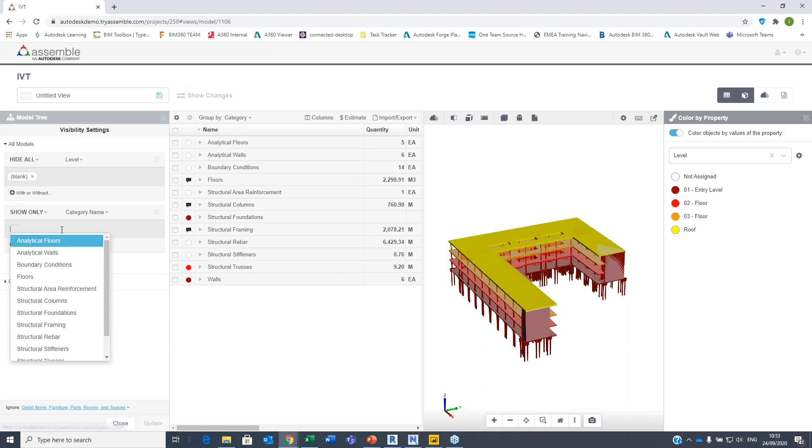Hide all. That's of course wrong, because what I want to do is, let's say that I want to add a model rule, show only the floors. That's going to be better. There we go, update. So we now have only those floors. And again, if I want to split it and show only the entry level and floor number 2, that's fine as well.

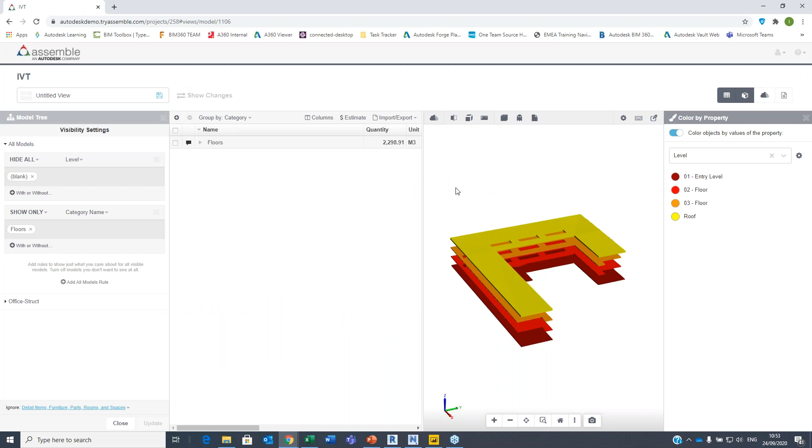Right. The other cool thing is that if we look at the website of Assemble, you'll see that we obviously have those add-ins. We also have this Excel add-in, and we also have a Power BI add-in. So what we can do here is say, for this element, for instance, all of the elements that I have here have what we call a waste calculation, which is empty. So the cool thing is that we can use an integration with Excel, which you see here.

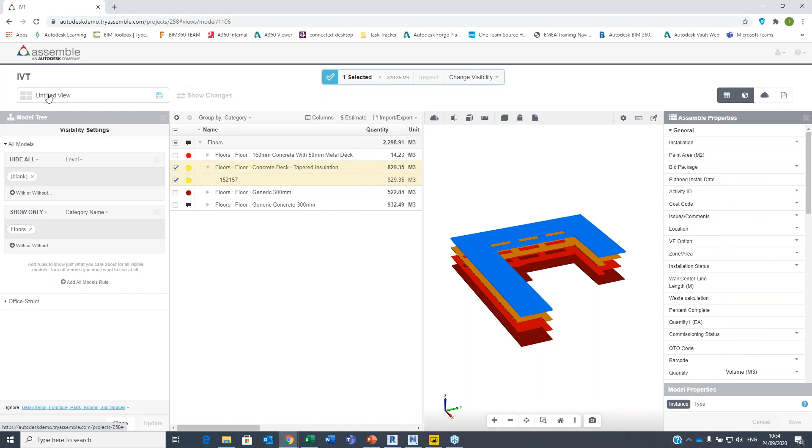And what I've done is I've configured my Excel connection to point to Assemble, to my project, to a certain view, which says waste calculation. I can actually show that inside of my view here. So if I go back, leave without saving, here's my waste calculation. And essentially, this is what I'm going to calculate my waste on. So these elements. I've specified what I want to pull from Assemble, and the only thing I need to do now is run this report.

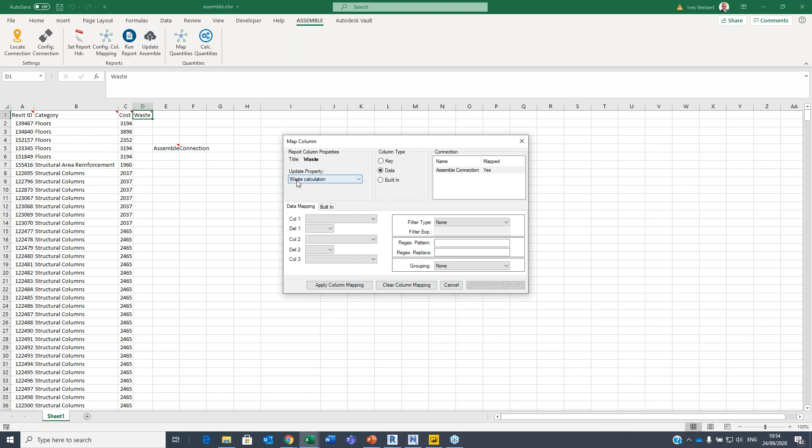The interesting bit is that it's going to tell me the different Revit IDs, the categories, the cost that I pulled from Revit itself, for instance, through the uniformat code. The one thing I do want to specify is that this waste is quite a specific one, because it says this is an update property, waste calculation. So what I can now do is say this equals 0.1 times that one. There we go. And I can now paste this, and I want to update Assemble. Continue.

There we go. So if I go into Assemble now, just refresh one time, and I look at this one, property, waste calculation, it now says 235.2. See? And we can take it to the next level, and that's the last part of the story here today, which is Power BI. So for Power BI, essentially what you download from the website is a template file.

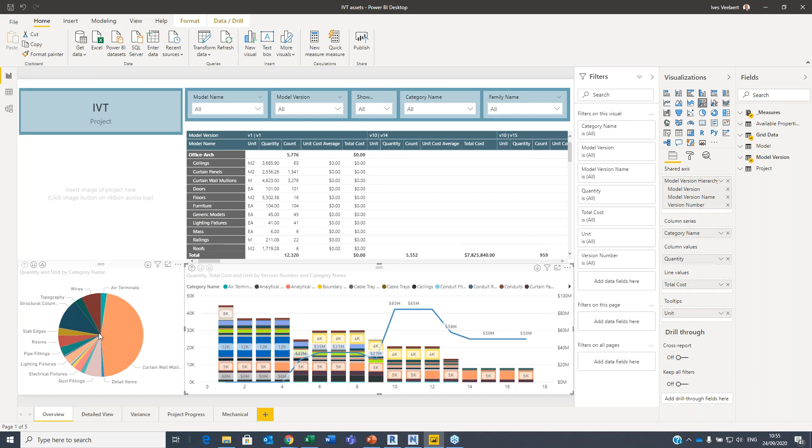And so what we can do here is have a look at my model. You'll see that we have those very same elements here, and I can look at variance, for instance. So because we have cost, I can now say I want my structural model, my version 17 versus this other one, and it's going to tell me that there is a difference of 3 elements, which is a total cost difference of so much.

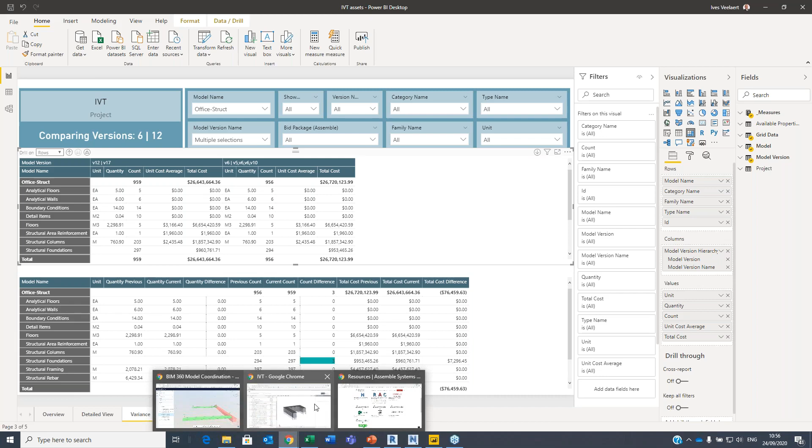So the last thing I want to show here is if I go to my structural model, I can actually show my changes between version 17 and that very same model that we had in the past. And it's telling me now that structural foundation, pile cap, and steel pipe is what's added. And those are indeed 3 elements, 1, 2, 3. And that's what's going to give us that result.

So it's still showing that. Let me just briefly refresh that again. Okay, show changes. 17 versus 10, update. Essentially, because these have been added, you see the color code, so added 3 elements. So between those 2 versions, we will have an extra foundation that's in there.

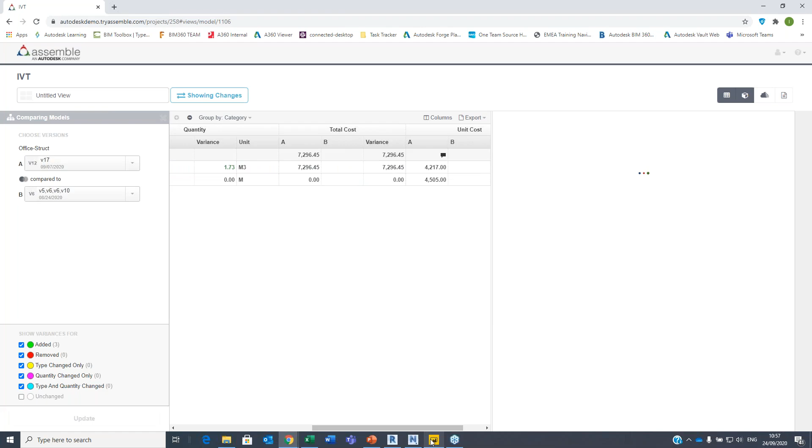The beauty is, while this is still thinking about it, I can go into my columns, total cost, unit cost, done. And what you'll see is that the difference in cost is 7,000, etc., which corresponds to what we have in Power BI. We can then publish this file. This is going to give us a URL, which, guess what, brings us full circle now. If I go back in BIM 360, I go into my project home.

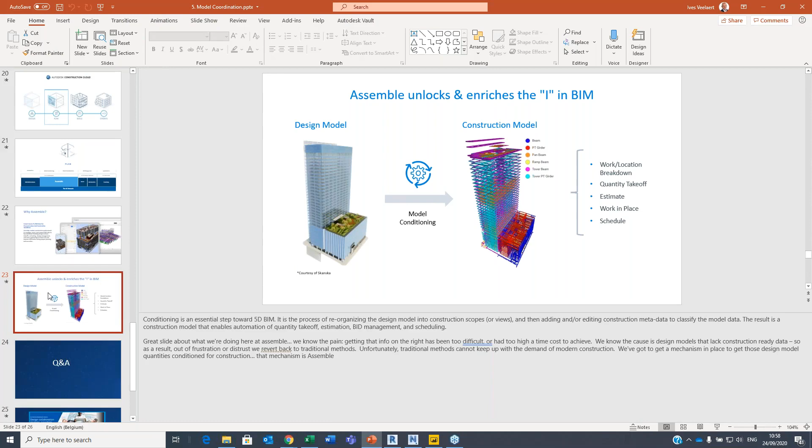I have the very same information here. All right. So that's how this whole thing works before we actually put one brick on the ground, before we actually start building this. So that's what I have for you today, guys. That's all I have. So we have a couple minutes for Q&A.

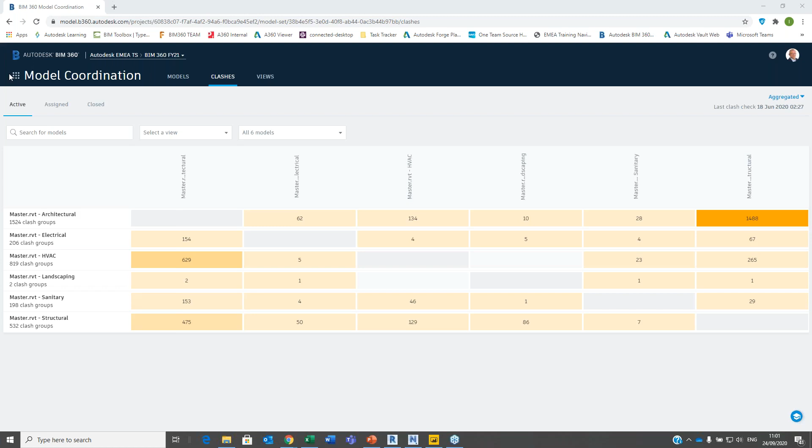Yeah. But in addition to that, BIM 360 has lots of good reporting forms, for example, to do issues reporting with the specific view of the clashes. Absolutely. That was indeed the next aspect of it. So if we go in here, those issues. There we go. So we can first of all filter on different aspects and then just export this as a PDF or whatever. Yeah, absolutely.

Great. And another question is, when you're using a Navisworks dataset in BIM 360, can the Navisworks selection sets and viewpoints be accessed and used? Yep. So all the different views that you have in Navisworks pop up as views in BIM 360 Docs. Yeah, absolutely.